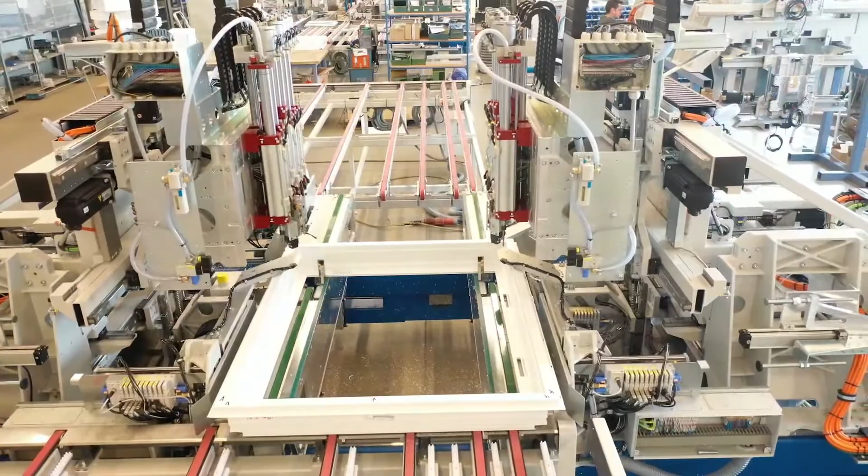Today we decided to go through a layout of a pass-through line with pre-location of hardware. On the screen right now you have two different layouts: one for frame and the other for sash. It's really just to give you an idea of sizing, but everything is custom, so we could be separating frame from sash, separating casement windows from hung and sliders, or putting everything on the same line. It's just to give you some ideas of how we can break things down in your factory.

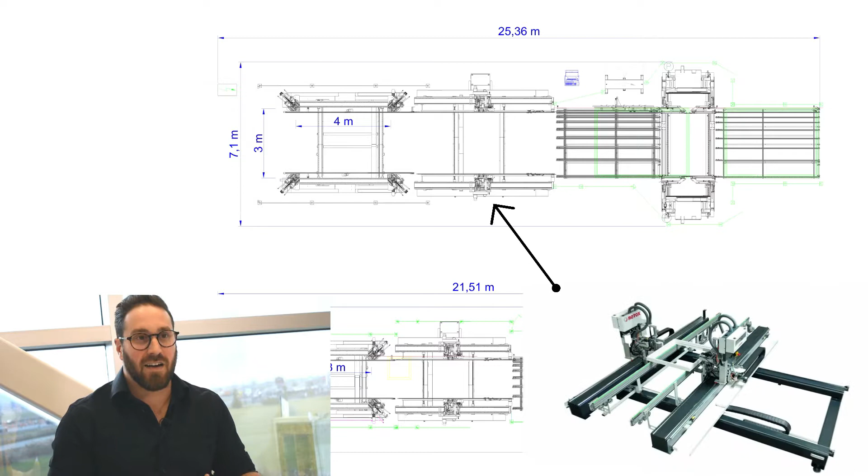Going from left to right on the screen, the first machine you see on both lines would be the welder, the second one would be a fab center, and the third one would be a corner cleaner, so a typical pass-through corner cleaner in that case.

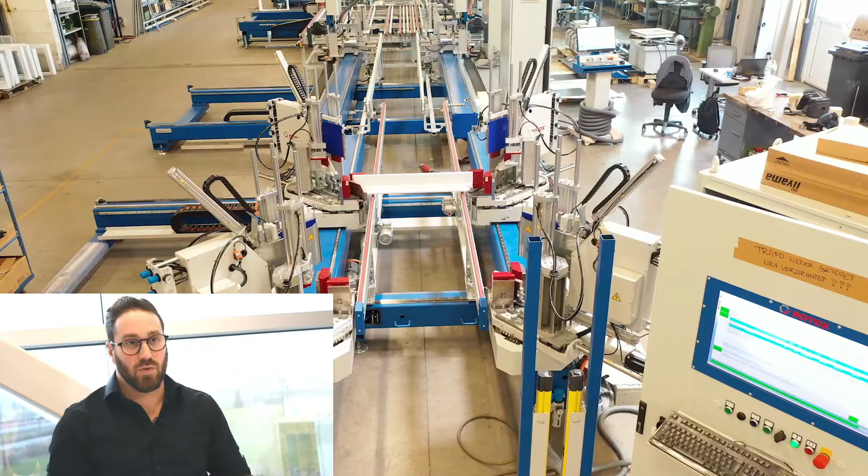Breaking down a little more, going back to the welder - you have two choices really. The first choice would be a conventional welder, that's probably what you have in your factory floor right now. It's a typical 2-minute cycle with loading and unloading. If you're going to a high-speed welder, you're going to be breaking down to just around 1 minute per cycle.

The biggest advantage there would be the servo motors running the machine give you a much more accurate weld. If I'm thinking about a size of 1000 millimeters, you'd have to put parts that are 1006. But if for any good reason you had a part that's 1007 millimeters, the machine would recognize it with the probe system that would tell the machine to melt 1 more millimeter before the weld. So your finished part would still be 1000 by 1000.

Nice information to have, because we can send that information to the glass stop saw. We could send that to your hybrid station, to your extension station, to your mullion station as well, kind of creating some live cutting list for your other fabrication needed to assemble your window. So it's all information physically in the machine that can be used elsewhere in your production. We're kind of approaching the 4.0 industry with that.

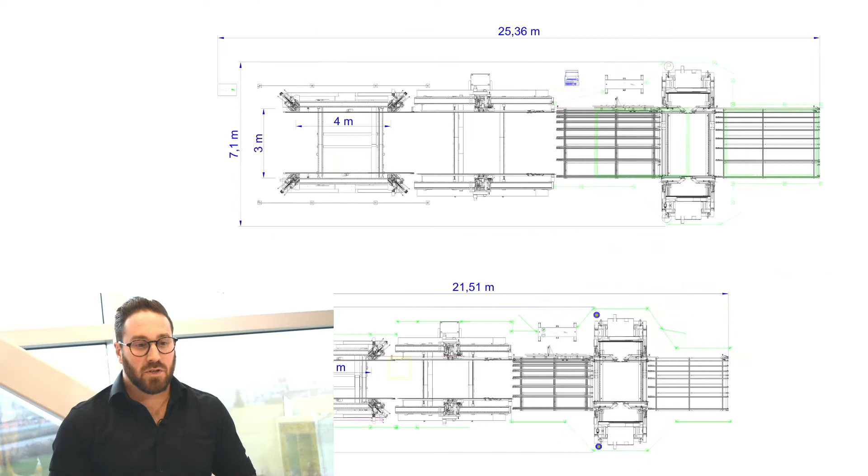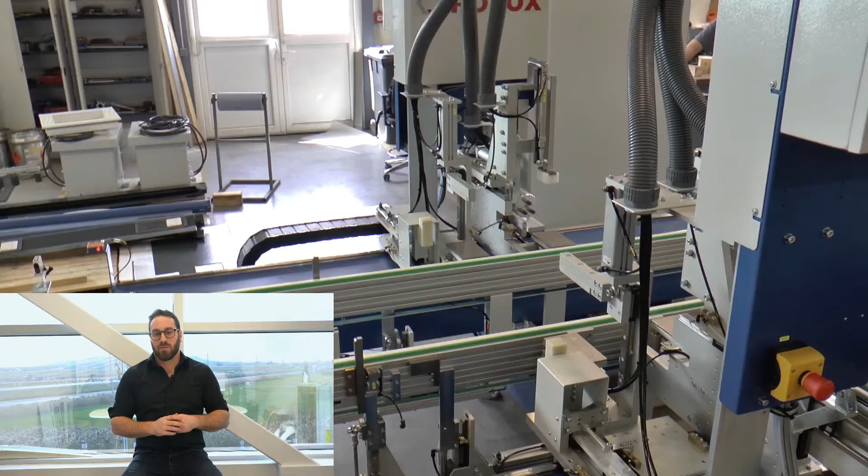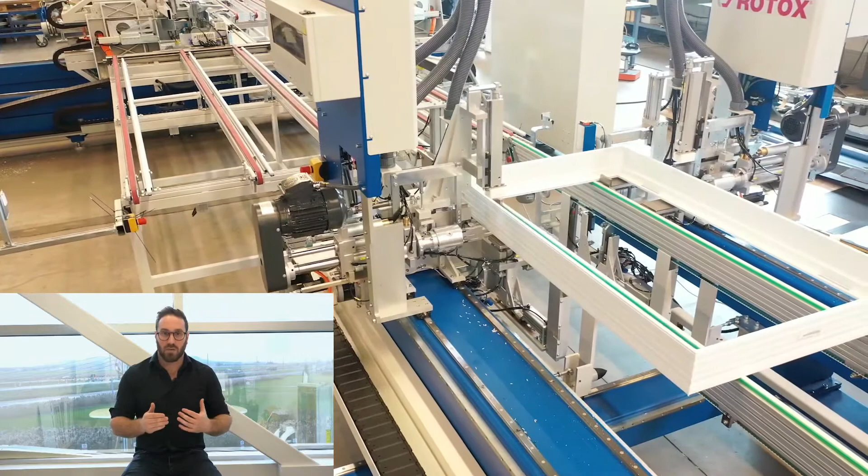The second machine really is a cooling station with a fab center on it, so it could only be a cooling station, just a buffer zone. But in Rotox's mind, why not use that downtime to do something productive. For example, on casement frame, hung and slider frame, we could pre-drill the mullion positions. The advantage there would be to do so while the part has been welded, instead of doing it before the weld, where you could have crooked posts for any good reason.

On sashes, you can do pre-location of keepers, snubbers, clips for fixed sashes. We could also do locks and handles for hung and slider, depending on the conception of your window.

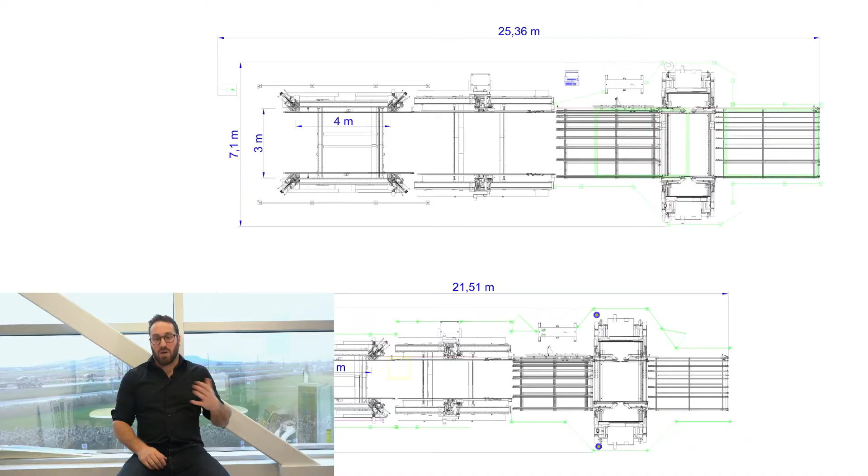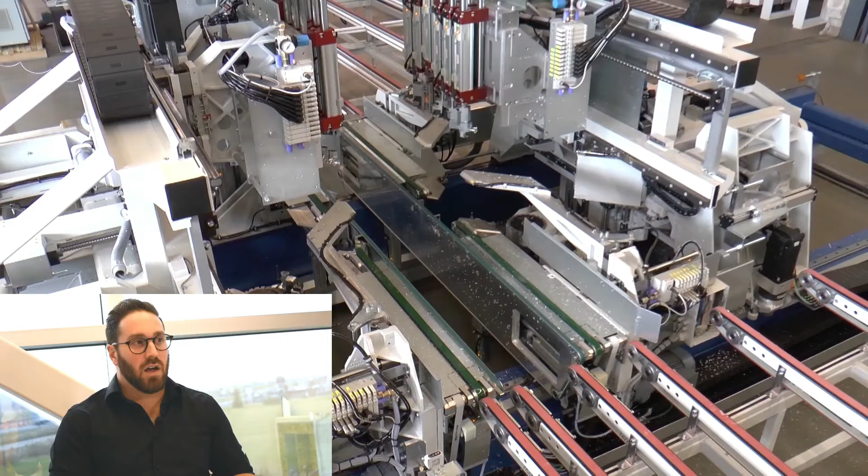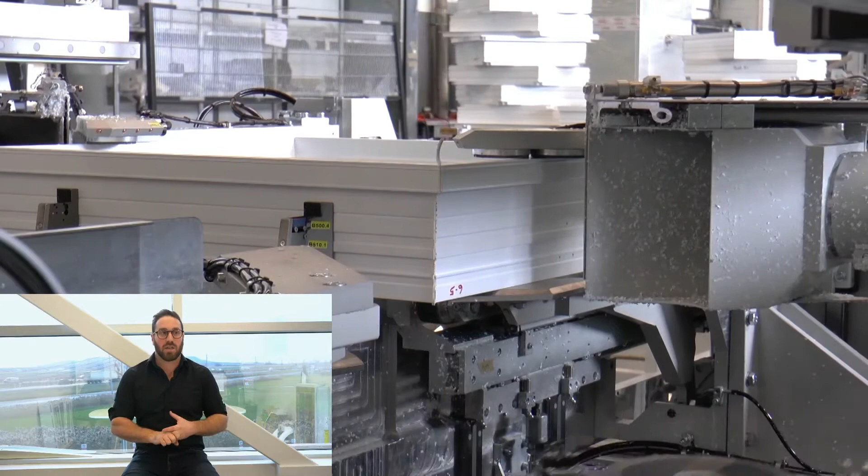Then we're going to the pass-through corner cleaner. We're obviously going to clean the window, but we're going to look at ergonomic saving time elsewhere in the factory. On casement and awning sashes, we're going to be pre-drilling hinges, corner brackets, operator arm, and on hung and sliders we're going to be doing pivot bars, tilt latch, and night latch. And crazy enough, at Rotox we guarantee 100% clean, so that means no one with a knife in his hands right now in your factory risking to injure himself or just damage the material he's working on.

As I said, there's many ways to look at this project, many ways to do a layout. It's all a matter of return on investment.